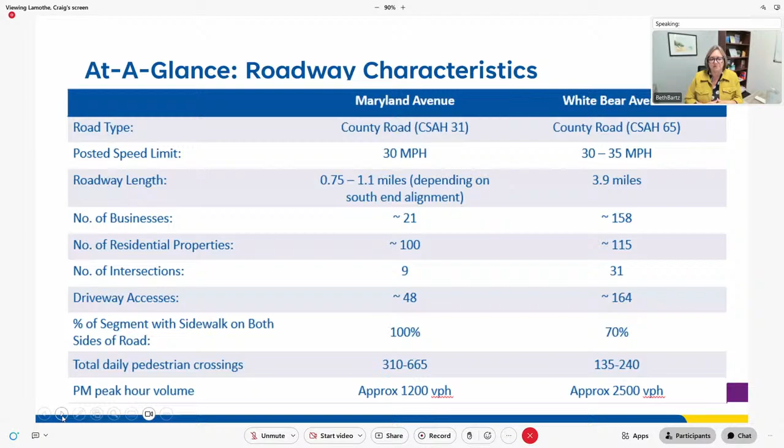So to dig into those characteristics a bit more, here we're looking at pedestrian volumes on Maryland and on Beam Avenue. Our highest pedestrian crossing location is Maryland and Clarence, with about 665 crossings in the 13-hour period where we see most pedestrian activity, from 6 a.m. to 7 p.m.

Maryland and Johnson is about half that, just over 300. Maryland and Hazelwood is in between, just over 400. There's a significantly fewer number of crossings, but still a good number, up on Beam Avenue at White Bear, and also at Southlawn, which is near the Maplewood Mall.

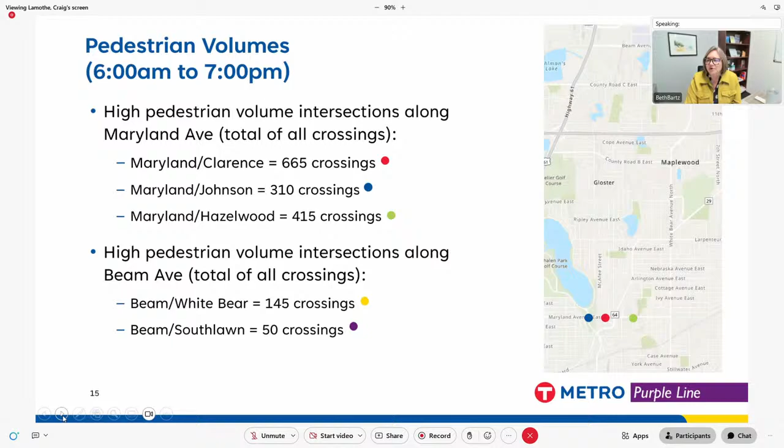As we go to the next slide, we can see that pedestrian volumes along White Bear Avenue sit somewhere in the middle of those numbers, with the high end being 240 crossings at Gervais, and the smallest number at County Road B with 135 crossings during that same period.

Now, what's interesting about White Bear Avenue is we've heard quite a bit anecdotally that pedestrians avoid crossing it due to the number of cars and the poor crossing conditions, which create a perception of it not being a safe crossing. So we believe those existing conditions are probably suppressing the number of pedestrians who might cross if conditions were improved.

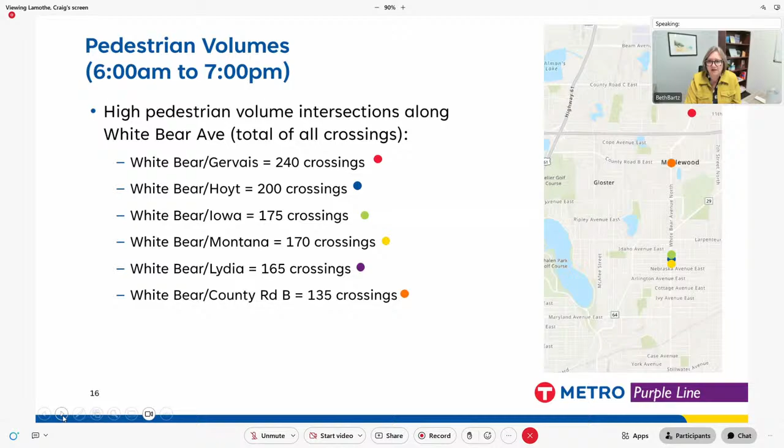So that really constrains us in those southern parts, and we've been very careful to look at options that minimize any impacts to property and right-of-way needs in that section of the corridor. As we get north of Larpenteur, we've got some more opportunities—the right-of-way is a bit wider, giving us more opportunities to look at different types of options for integrating a transit way into those roadways.

From a safety analysis standpoint, we wanted to make sure we were considering both vehicle and pedestrian safety along this corridor. We've got 7 intersections experiencing crashes higher than we'd expect for a road of this size with this amount of traffic volume. Again, those higher crash intersections are located towards the southern end of the corridor, particularly on Maryland, and we're very much aware of the need to have this project improve those safety conditions if at all possible.

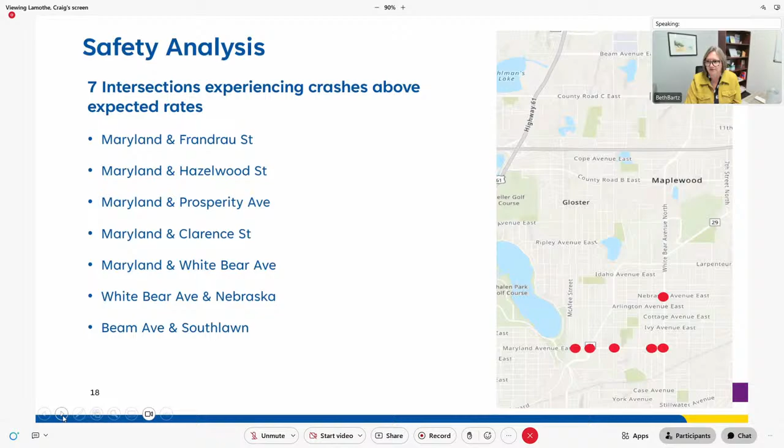As a basic rule, we wanted to look at options that had no more than 4 lanes of vehicular traffic, including the transitway along this corridor. Also, we did not want to look at any grade-separated options, primarily out of respect for that narrow right-of-way and wanting to minimize any property impacts along this corridor.

Similar to that, we also wanted to make sure that we were looking at good station access locations, and we talked about that with you last month. Transit options on the Maryland segment need to be both operational for Purple Line and for the planned H Line arterial BRT system, which is planned to continue on Maryland west of the corridor and then proceed south on White Bear Avenue, moving toward the Gold Line corridor.

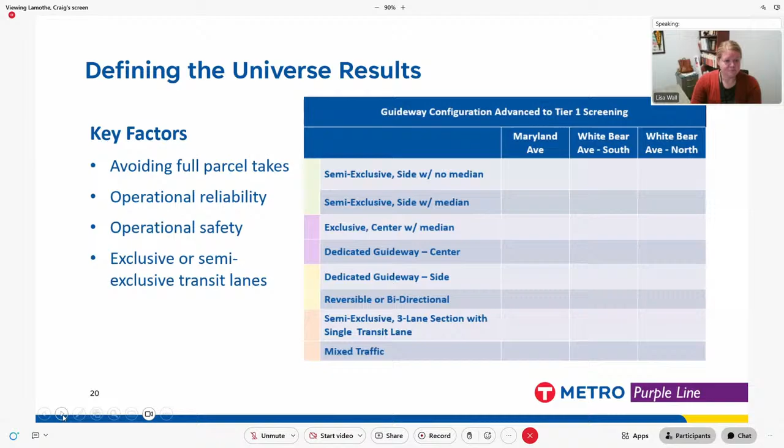One of them was avoiding full parcel takes, wanting to minimize that in the areas between stations. Operational reliability and safety was a key consideration as we went through this universe of alternatives process. And then prioritizing the exclusive or semi-exclusive transit lanes, which essentially means providing priority for the bus in these corridors. We can go to the next slide, and we'll start to walk through these options.

So the first 2 cross sections are our side-running options. The top option is what we're calling semi-exclusive with no median, which is essentially 4 lanes of roadway—2 of those lanes, northbound/southbound or eastbound/westbound, would be bus-only. The bottom cross section incorporates the addition of a median, which would be in the middle of the roadway, provide access management, and also provide some potential opportunities for additional pedestrian refuge area within the middle of the roadway.

We use the terminology semi-exclusive to highlight that these are bus-only lanes, but they would likely be utilized for cars accessing businesses or residences, or for right turn lanes. There's no physical separation between the lane and the general purpose lane.

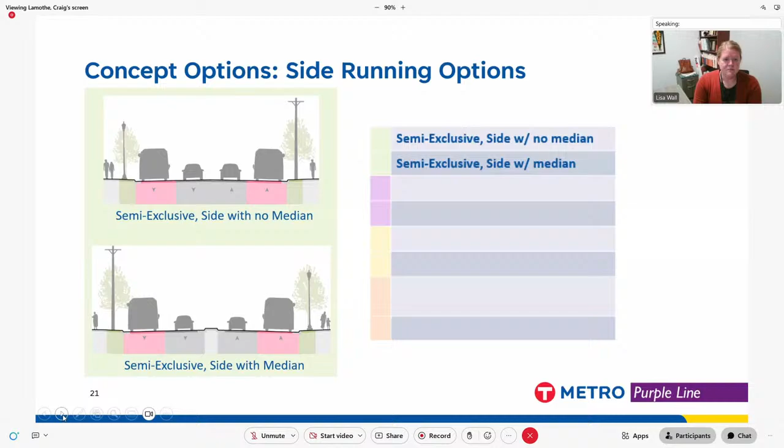Next are our center-running options. This moves the guideway from the outside of the roadway into the middle. In both of these, we have a northbound and southbound, or east and westbound, bus lanes in the middle. The top cross section has a median in the middle of the roadway, which allows and provides some access management to prohibit left turns across the guideway, allowing the bus to have more free-flowing movements.

On the bottom is our dedicated guideway. This moves the median from being in between the 2 bus lanes to being on the outside of the bus lanes, providing a physical separation between the general purpose lanes and the transit priority lanes.

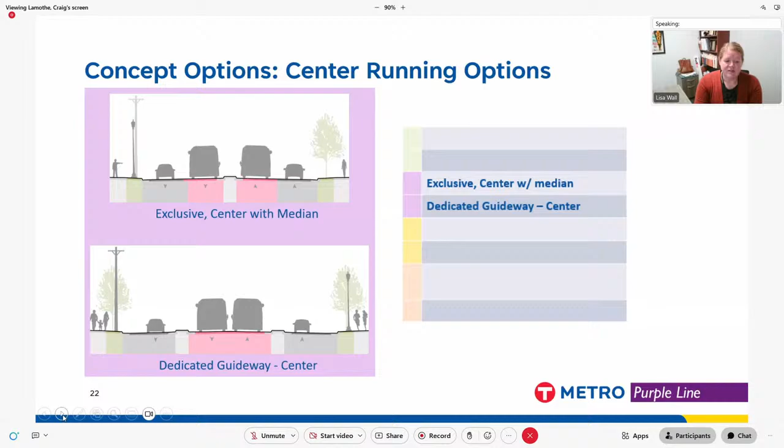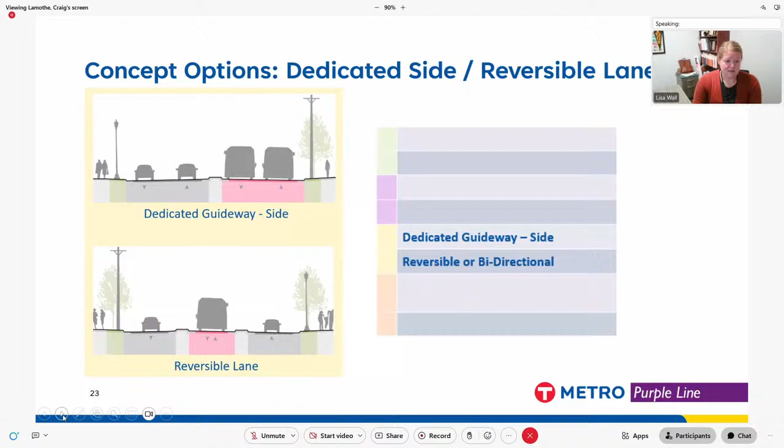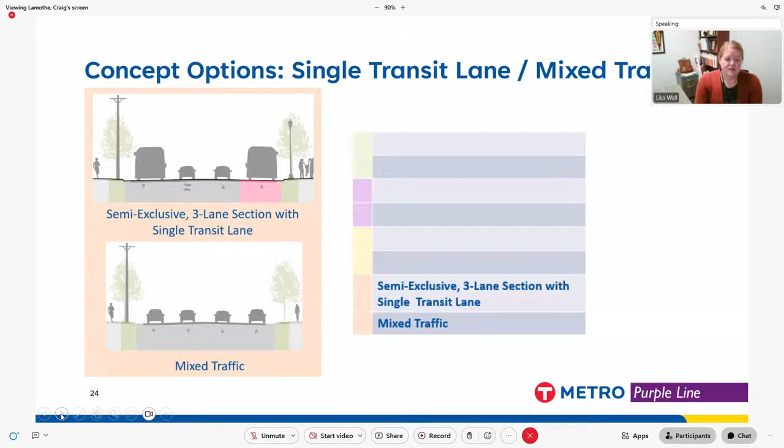So we still maintain the 4 lanes across, but with 1 transit priority lane, in the opposite direction buses would be traveling in mixed traffic. On the bottom, we did look at and evaluate mixed traffic within all of these segments as well.

I mentioned to you that we were going to see this slide before. Won't spend a lot of time here, but we're going to walk through how these key factors played into identifying which alternatives would advance forward into the tier 1 analysis. We can go to the next slide.

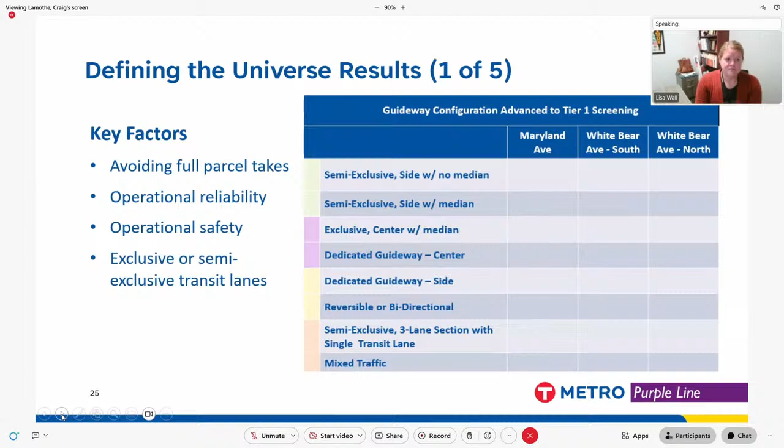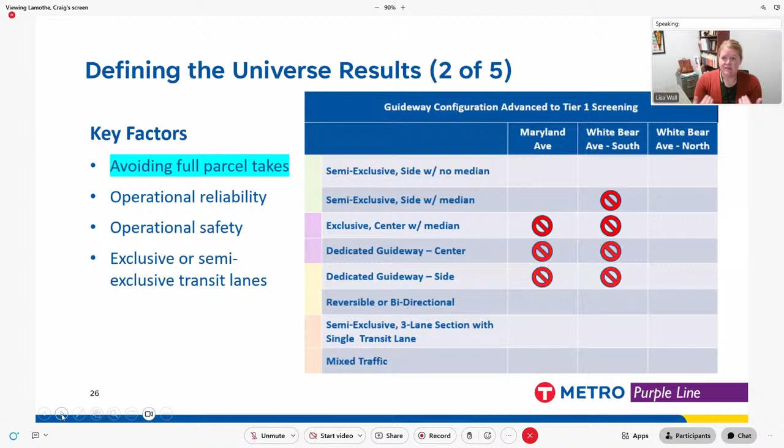Similarly, on White Bear Avenue South, those alternatives also came off the table because they would require full parcel takes. In White Bear Avenue South, also the semi-exclusive option, where we incorporated a median, also resulted in full parcel takes. So we identified that to not proceed forward.

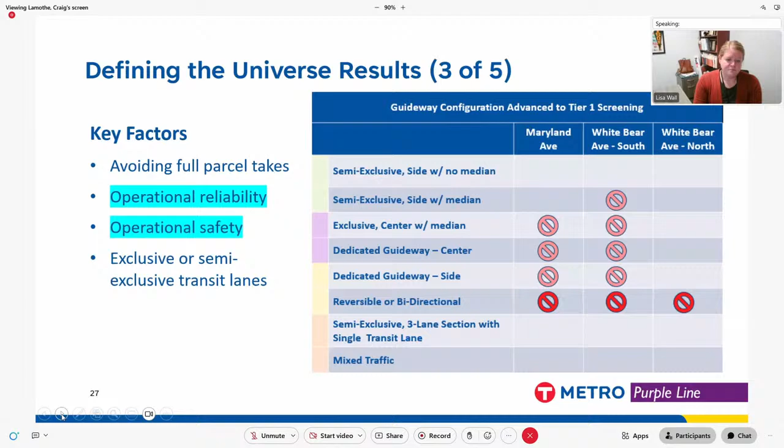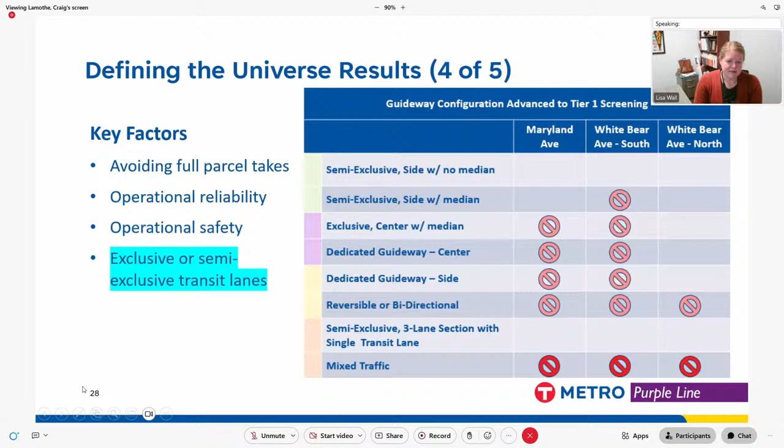So where does that leave us? The slide before had circles with a line through it indicating which alternatives were eliminated. The table has now been revised to show check marks for which alternatives are moving forward to the tier 1 analysis. Within Maryland Avenue, we had 3 cross sections identified to move forward. In White Bear Avenue, the southern portion of the corridor, we had 2 alternatives that advanced forward. And the White Bear Avenue portion north of Larpenteur, most of the alternatives were identified to advance forward, except for the reversible and mixed traffic alternatives.

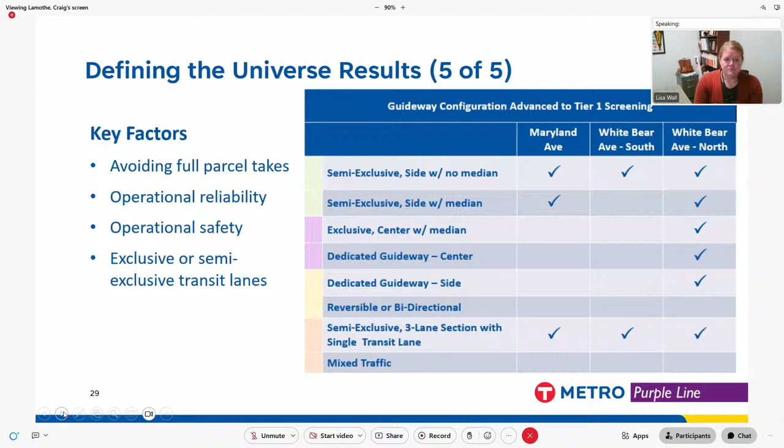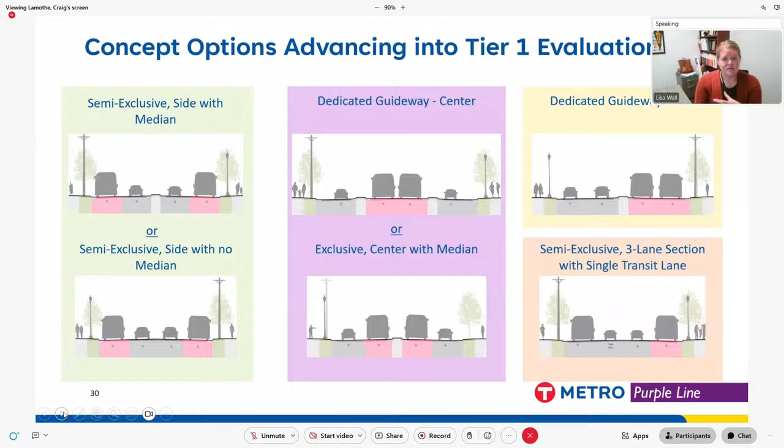Just to refresh, and I shared a bit about this when walking through the table, the alternative that did not advance was the reversible or bidirectional lane. Operationally, the reversible lane has significant challenges if implemented over a significant distance. The reliability and performance of that alternative becomes more challenging, and there's also more signaling and safety concerns due to the directionality of the bus. Sometimes you may see a bus going the same direction as you if you're in a car, other times you may see it coming towards you, and we're concerned about the confusion that may cause.

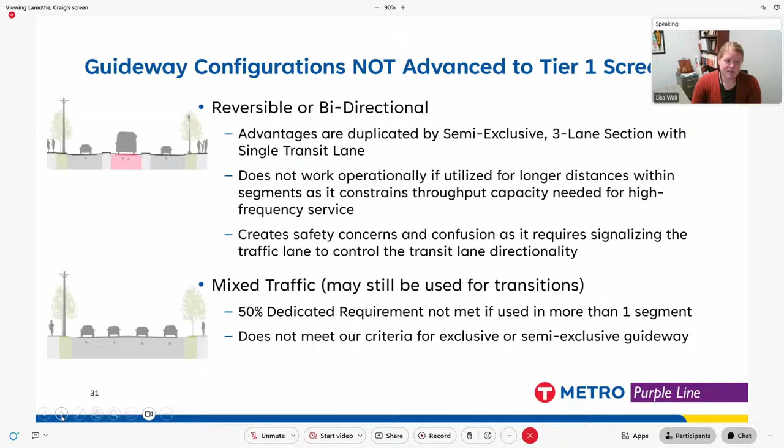The mixed traffic option also came out, referencing back to the 50% dedicated guideway requirement, and not meeting the criteria for exclusive or semi-exclusive. I do want to note that on mixed traffic, we will likely have portions of the corridor that require mixed traffic just to transition between different configurations, so there will be areas, just not wanting it to be an entire segment.

After completing our defining the universe of options, we move to our tier 1 screening. We're looking at how to combine those different cross-section elements into full corridors. The tier 1 process will show you how we got to the 4 options we are recommending today. As shown a few moments ago, we had these 6 cross-section options, which we are combining into various corridor segments.

Early in the tier 1 process, we determined that we needed to eliminate the dedicated side-running cross-section that Lisa described earlier. As we looked at sections of the corridor where that might be appropriate, we found significant concerns with those driveways I referenced earlier, looking at the number of driveways vehicles would need to cross moving into and out of properties on the side where that dedicated transitway was located. It also potentially interfered with the reliability of that transitway if a vehicle paused in it while merging into traffic. It created a lot of safety concerns and operational issues that we felt did not merit that cross-section moving forward.

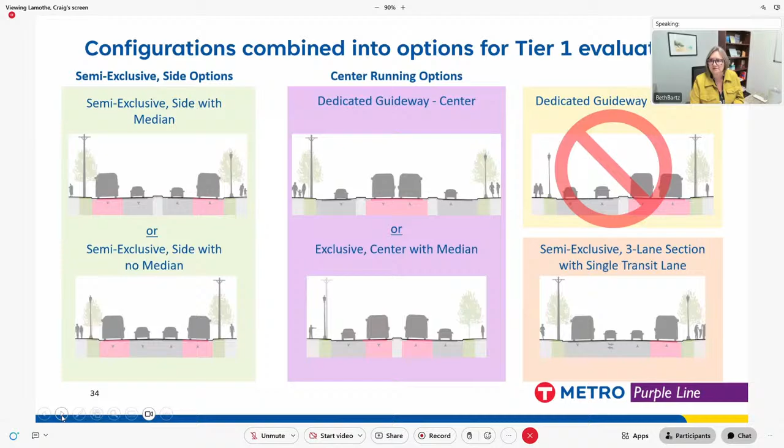So we took our 5 remaining cross-section types and looked at 6 different combinations, making the most sense of how they could piece together to form a cohesive whole along Maryland and White Bear up to Beam, based on the matrix Lisa went through with you that had the circles with the crosshatch and checks. These are the 6 combinations we came up with, and we then applied our tier 1 screening criteria to these 6 options.

Those criteria built off of what we looked at in defining the universe. We were looking at concept dimensions - do these meet the minimum dimensions acceptable to both Metro Transit and Ramsey County and the cities as they looked at optimal dimensions. The continuity of the guideway configuration from segment to segment - how many times are we transitioning where buses would sit in relationship to other traffic. Again, taking a closer look at property impacts, still high level, focused generally on the width of that option, but taking a closer look at where we'd just have strip takings.

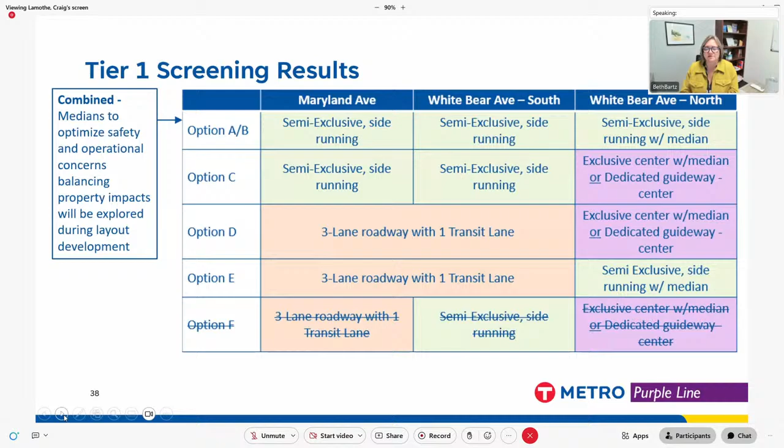Which Lisa is now going to walk us through. Yes, so we're going to walk through and show you some graphics. A lot of you are seeing this for the first time, so we want to make sure you understand how these different alternatives tie together to create the continuous alternative.

So we're going to start off by looking at option AB, which is the semi-exclusive side running. You can go to the next slide. The table is set up similarly to the table on the previous slide, where we have Maryland Avenue, White Bear Avenue South, and White Bear Avenue North. The top row here is a picture of the existing conditions.

So we'll walk through Maryland Avenue first. These pictures on future slides are all going to be the same, just to help refresh your memories on what these segments look like. Maryland Avenue is an existing 4-lane section today. The middle row here is the proposed cross section, which is the side running. Now, as Beth just shared, some places may have a median, some may not. What's represented here is no median, but we are looking at that and will incorporate it where needed.

And this bottom row is the plan view. So instead of a cross section, what does it look like from the top view down, showing the 2 general purpose lanes here in gray and the transit-only lanes in pink. I'll just remind you all that there are cars grayed in on the pink lanes. Again, that's just to represent that those lanes would likely have some cars in them, either accessing businesses, properties, or right turn lanes in the corridor.

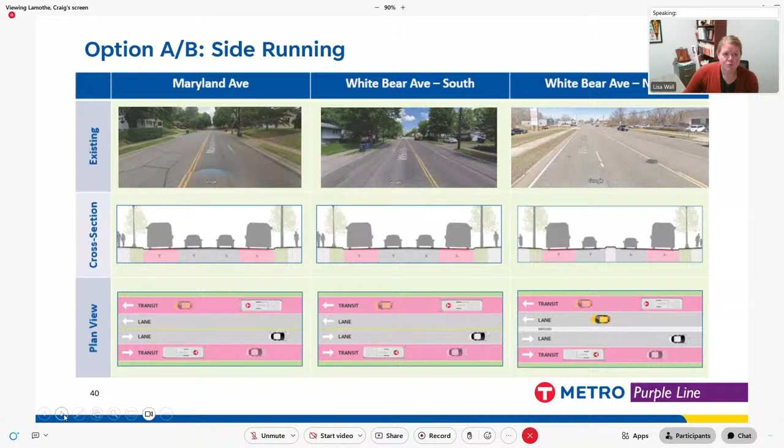Not only does the right of way get a little bit wider, there is also a large portion of that corridor that has an existing left turn lane or median there today. So as this side running option advances forward, we would incorporate that median to match more closely with existing conditions out there today.

Option C is similar on Maryland and White Bear Avenue, south portion of the corridor. We are introducing the center guideway into that northern portion.

Option D has the 3-lane roadway with a single transit lane and a center running guideway in White Bear Avenue, the northern portion of White Bear Avenue.

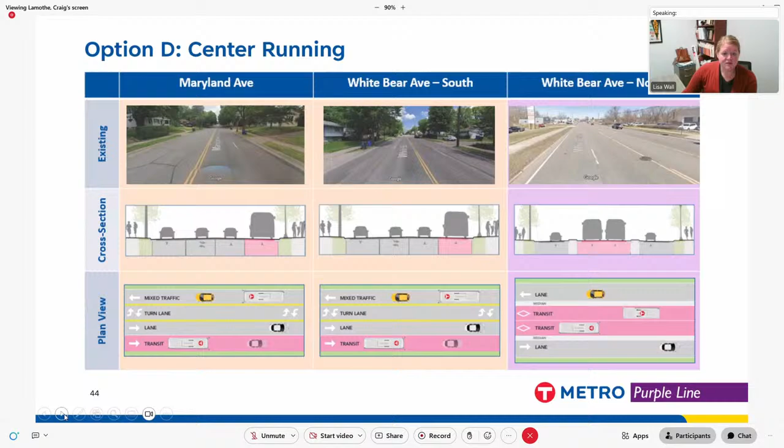On Maryland Avenue, White Bear Avenue South, we are introducing that 3-lane section. Within the cross section we have a single pink lane. Buses in one direction would be in that pink lane, and in mixed traffic in the other direction. We have not yet identified which direction would be the transit priority lane - it could be northbound or southbound.

Again, in the plan view you can see what that looks like. We have the general purpose lanes in gray, and the transit only lane in pink. Then we would transition somewhere between in the Larpenteur area from that 3-lane section into a center running guideway where the bus only lanes are in the middle of the roadway.

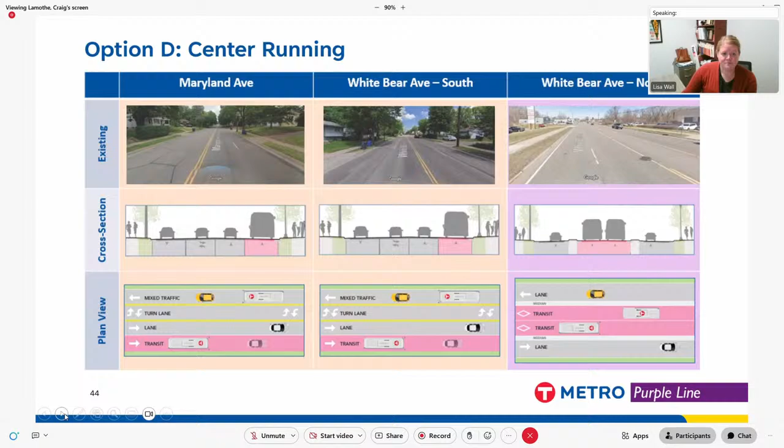Then option E, our fourth option - instead of a center running guideway in the northern portion of White Bear, it is now a semi-exclusive or side running alternative.

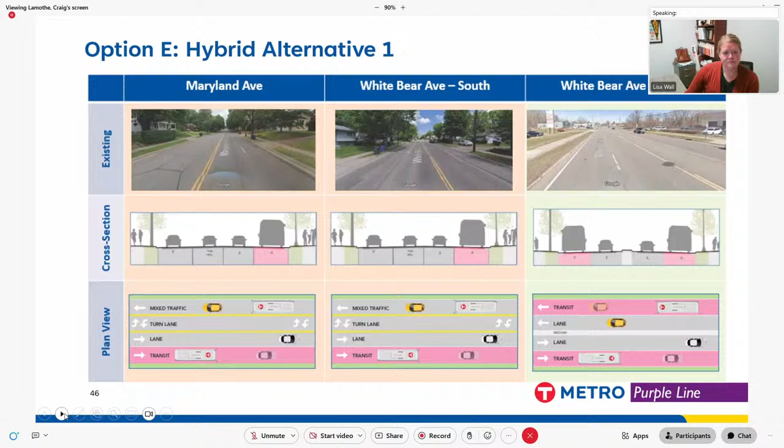This is a summary of the four alternatives that are advancing forward. Hopefully that walkthrough of the cross sections and plan views helps you visualize what these alternatives are as they get applied to the different segments of the corridor.

That is a lot of information. Really appreciate it, Beth and Lisa. The devil's in the details, and there's a lot of details here. I really appreciate you not only telling us how we got here, but what we're advancing going forward through this tier 1 screening process. So let's pause, and open it up for any comments, questions, and discussion at this point for the project team.

I have a quick question on behalf of the council member. I'm going to assume we're moving to a point in this presentation where we talk about how the 4 to 3 lane conversion is no longer an option.

Yeah, let's address that. It's my understanding the project team is aware of the request from City of St. Paul to consider this 4 to 3 option, and maybe Craig can walk us through the project team's assessment of looking at that.

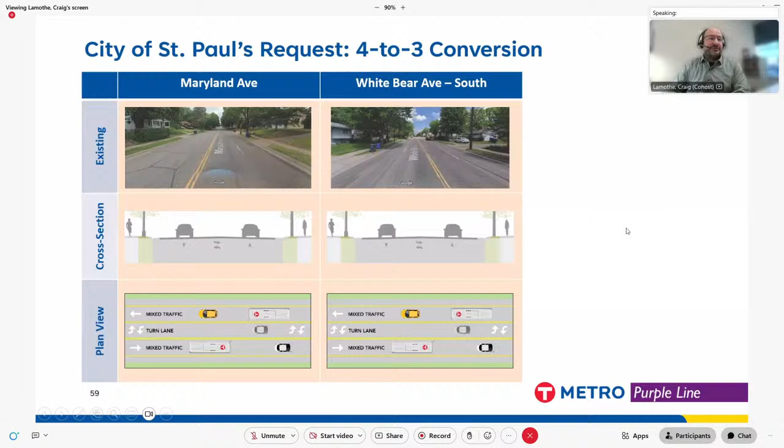So it's essentially a variation of the mixed traffic option that was identified and screened out as part of the universe of options that Lisa covered earlier. Now I'll talk a little about why project staff did not recommend and support the city's request to advance a 4 to 3 conversion as part of the tier 2 evaluation that's taking place on the options moving forward.

First, it's contrary to previous policy direction. The letter Ramsey County sent to the city of Maplewood at the end of March was pretty specific in terms of pausing advancement on the Bruce Vento Trail corridor and instead looking at the White Bear Avenue, Beam, and Maryland corridors. That really focused on acknowledging that as part of that process, there would be a conversion of one lane in each direction to a dedicated bus lane. That's language directly from the county's letter to the city of Maplewood.

On these big projects, we often focus a lot on risks—risks as we move forward, risks we need to mitigate and manage. Some of the key risks associated with the 4 to 3 conversion relate to criteria Lisa mentioned as part of the universe of options and the tier 1 evaluation: in order to maintain eligibility within the federal program we're pursuing transit funds from, the federal government expects at least 50% fixed guideway from end to end on a project like this.

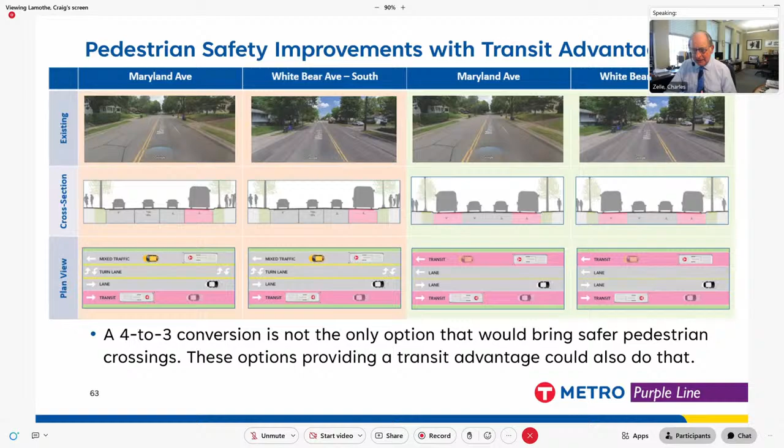Okay, any other comments? I want to give a chance for Stephen Smith to present on some of these roadway design and transit design concepts, and we'll have time for a few more questions after that.

Go ahead, Stephen. Thank you, Mr. Chair. This is really about the next steps, the next phase we're embarking on. I'm going to have Liz also help me out and talk a little bit about community engagement in that next phase too.

Go to the next slide. I really just want to focus everyone's attention inside the box. I think all the great conversation we just had really segues into what we're about to talk about now, which is building on top of the Tier 1 screening, but now we're moving into the Tier 2 evaluation, meaning all the questions related to getting to that layout, getting to the traffic analysis, that's what we're going to end up focused on.

That's what the traffic team, or the Purple Line team, is going to focus on. One thing I also want to bring your attention to is that we're here in October. The next time we plan to bring information to you related to how all 4 options we presented today are performing and rating out, we plan to bring that around the March timeframe. There's a lot of time between now and March, so we're hoping to maintain that timeframe with all the detailed analysis we have to do in these coming months.